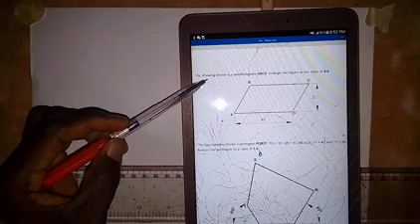Here we are still working on the enlargement of this figure, as we have looked at method 1. So this is method 2 now. We are going to look at method 2, as we are told that the drawing below is a parallelogram ABCD, and we are to enlarge the figure in the ratio 4 to 6.

All right, so this length AD is 40 millimeters and the height of the parallelogram is 30 millimeters. This line AB is inclined at an angle of 60 degrees. As I said, I forgot to put the value of the angle here, and the exterior angle is 120. If that is what is given to you, the exterior angle is 120, because I made the drawing myself.

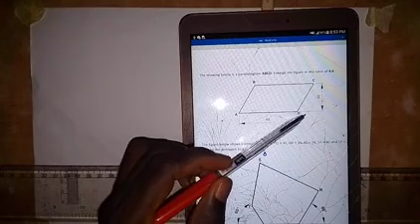All right, so line CD is also inclined at an angle of 60 degrees, because these two sides AB and CD are parallel to each other, as AD and BC are also parallel to each other. So we are going to be replicating the given figure, and the ratio of enlargement is 4:6. All right, so let's look at the second method.

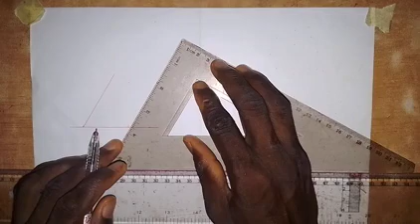So what we are to do is to replicate the figure first. So we draw this line. I will draw it here. We take a measurement of 40 millimeters for line AD. So this is 40 millimeters, and then with the 60 degrees set square placed at this point, we draw a line in this direction, and from this point we draw a line in this direction.

So I'm going to label this point. This is point A here, and this is point D here. The height of the figure is 30 millimeters. Just move away, draw a short vertical line like this, and take a measurement of 30 millimeters. From this point, up, take 30 millimeters. This is 30 millimeters, and then draw a horizontal line from this point to the figure.

So here we have point B, and this is point C. So we have constructed the figure. Let's make it look more visible by thickening it a bit. Okay, all right, so we have the figure here.

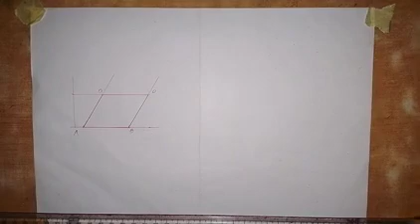The next thing we are going to do is the enlargement, to make the enlarged figure. What you have to do for that is extend this line a bit, and on this line, as the ratio of enlargement is 4:6, we are going to make 6 equal divisions from point D. This is point D, not B. So from this point D, we are going to make 6 equal divisions on this line.

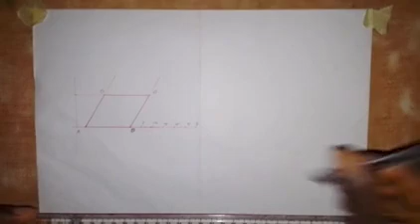So from point D, I will take 10 millimeters. This is 1, this is 2, and this is 3. This is 4, this is 5, and then I have 6 here. Now the next thing I'm going to do is to number each of these points: 1, 2, 3, 4, 5, and 6 here.

Then what we are going to do now is, from this point here, draw a vertical line. So we draw a vertical line from point D, a perpendicular line at 90 degrees at point D. Draw that line of any length. I'll call it line DE, of any length.

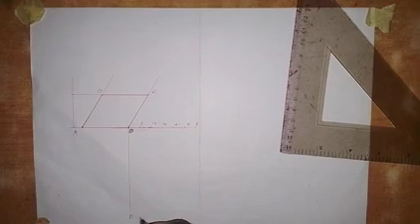Next, we are going to bisect distance A4, the distance between point A and point 4. We bisect it so that we can construct a semicircle on it. If you have to construct a semicircle on 2 points, you have to look for the midpoint of that line. So what you have to do is this.

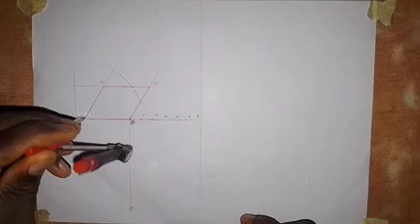With the pinpoint of the compass here, extend the compass to a distance a little bit more than distance A4. I think this is okay. So we draw an arc up here and we draw it down. Then we put the pinpoint at point 4 here, and we draw an arc up and an arc down. All right, so we are going to draw the bisector of A4.

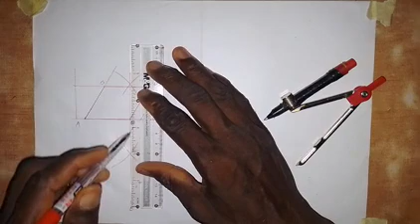So it passed through the line that comes out from D, so that is coincidence. Just leave it like that. Okay, so what we have to do now, so this is the midpoint, this point here, so we are calling it point X, which is also point D, so it's the midpoint of A4.

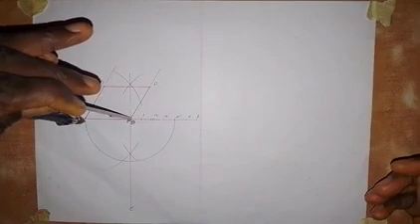So put the midpoint here where the line touches the line AD. So put it here and extend the compass to point 4, or the pencil point to point 4 here. Okay, extend it to point 4. Then draw a semicircle like this. All right, so the semicircle touches this line that comes out, that is line DE. It touches at this point, so we call it point 4 prime.

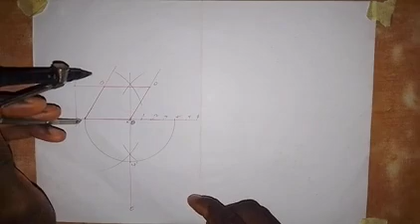Okay, so next we are going to construct a semicircle on point A and 6. So what we have to do, we need to bisect distance A6. So put the pinpoint here at point A and extend the pencil point to a convenient radius. Okay, so then we draw an arc up here, we draw an arc down here. So putting it at point 6 here, we draw an arc up and we draw an arc down.

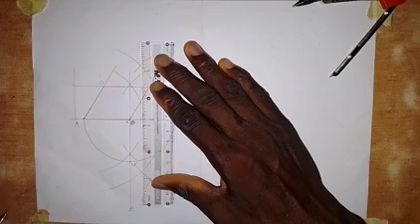All right, so then we are going to draw the bisector of A6. So it goes like this. All right, so the line touches this point. So this is point Y, this is the midpoint of line A6. So we put the pinpoint of the compass here at point Y, extend it to 6. Extend it to 6. Okay.

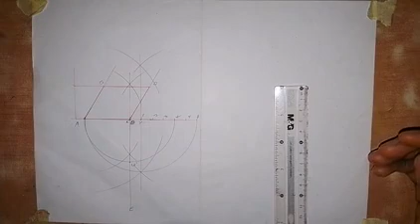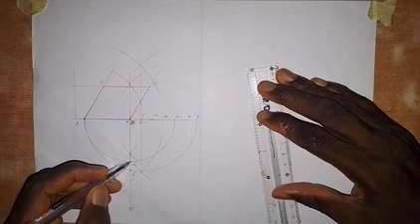All right, so then we go on and draw a semicircle. So it goes like this. Okay, so we have it like this. So the semicircle touches line DE at this point here. So I'll call this point 6 prime. Okay, so now the next thing that we are going to do is to join this point 4 prime to point A, and it goes like this. So just join like this.

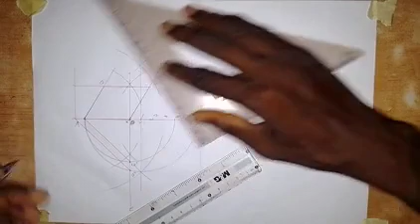All right, so then the next thing that we are going to do is that we set the set square on this line A4 prime. Then we want to locate the new point A1 for the enlargement. So set the set square on line A4 prime and put the ruler under it. Then shift the set square to point 6 prime like this. Slide it to point 6 prime and draw this line to touch this extension of the horizontal line. So where the line touches this horizontal line is point A1 for the enlargement.

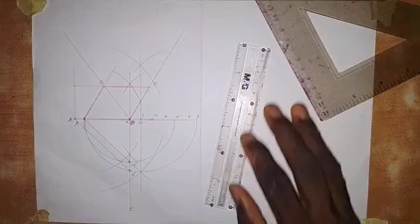Okay, so the next thing that we are going to do is that from this point D, draw a line through point B on the figure. So draw a line like this. Okay, and then we also extend this line. So then the next thing that we are going to do is to draw B prime, sorry, B1. So as we have gotten A1 here, we have to get B1 on this line.

So what you have to do is to set your set square along this line AB and then shift it to point A1. So shift it to A1. So we draw this line from here to touch this line that comes out from point B. So at this point here we have B1. Then we have to locate point C1. So set the set square on line BC like this, and then shift it to B1. Then we draw this line like this.

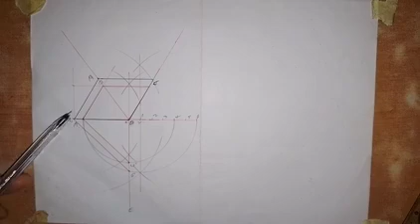All right, so looking at what we have here, we have enlarged this figure. So make this line a thick line, and then this line, we make it a thick line. So we have enlarged this figure in the given ratio 4 to 6. It's as simple as I've done it here. So the enlarged figure is A1, B1, C1, and D.